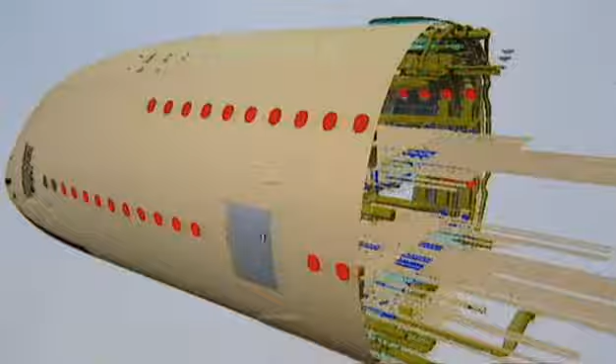European plane maker Airbus is staking everything on a machine that they hope will replace the big Boeing and dominate the market for years to come. By any standards, taking on the 747 is a massive gamble. If they succeed, they'll make a fortune. If they fail, billions will have been thrown away.

This aircraft cannot be a failure. When you invest $10.7 billion on building what we're pronouncing to be the flagship of the 21st century, you can't fail. There isn't a 'well, we almost got there' or 'it's so-so, not too shabby.' No, either it's going to be that flagship of the 21st century, or it's going to be a disaster.

Since 2003, Channel 4 have had exclusive inside access to this huge project, from the senior management fighting deadlines and budgets. The people are exhausted already. They are under the highest pressure you can imagine.

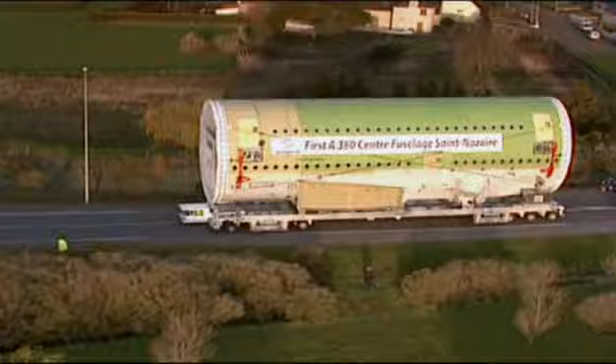To the men and women actually building the plane. These moments really piss me off. It's a tale of the struggle to manufacture giant components all over Europe, and then to ship them to France for final assembly. We are crazy. It's a mammoth high-technology engineering challenge: the race to build, test, and fly the brand new machine.

In charge of it all is 48-year-old Charles Champion, head of the entire project. He understands only too well the risks involved. What is at stake, I would say, with such a program is basically the future of the company, as such. Really? Really.

Airbus was created in the 1960s, when Spain, Britain, France and Germany decided to take on the might of the American aviation industry. Their first aircraft took off in 1972, and nowadays they make over 300 planes a year. But the A380 is on a different scale altogether.

Building such an aircraft, it's a bit like climbing a mountain. You see the mountain in the distance, it looks high, but not too high. And you start walking, and you get to the first level, and then you say, 'Whew, this one was hard.' And you get to the next one, it's even harder, and so you see the summit. It's getting closer, but at the end of the day, there's still a lot to walk and a lot to climb.

The project began 17 years ago. Philippe Jarry was involved from the start. I think it was in '88 where there were the first meetings, very secret meetings, between very few people in Airbus who said, well, if we had to imagine a very big airplane, let's say 500 or 600 seats, how would it look?

Starting from scratch is the most expensive option, but it's what Airbus decided to do. The plane went through dozens of iterations as designers and engineers worked for over 10 years.

The size was driven by the airlines, struggling to increase passenger numbers in the face of increasing air traffic congestion. The airlines told us, don't be shy, don't hesitate. Of course it has to be big, bigger than anything that is flying. So don't be shy, don't hesitate. Make it really big.

The resulting design was a plane with 49% more space than a 747, capable of carrying over 850 passengers. Using advanced technology, it would be highly efficient and, crucially like the Jumbo, have no competitors.

If they could get it right, the A380 could fulfill its ultimate goal: to make huge amounts of money. Is this about money? Of course it is. Think about the revenue potential. Each airplane sells in today's dollars at a catalog price of about $300 million.

Now, over 20 years, our global market forecast is about 1,600 aircraft. Assuming we got that entire market - we won't, but assuming we did, with a monopoly position you'll get pretty close to it - that would be, over the next 20 years, $480 billion US dollars. Suppose you only get half of it: $240 billion US dollars at catalog price. Now that is an awful lot of money.

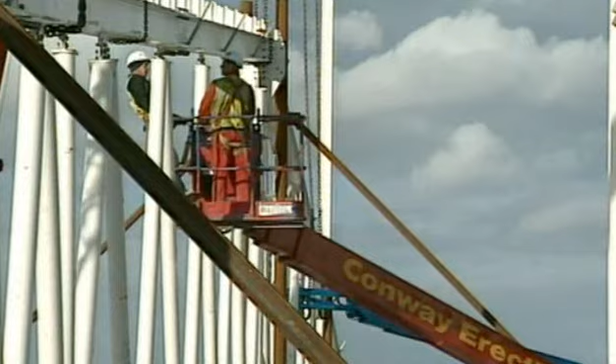December of the year 2000. Now that Airbus have a basic design for their huge new plane, they can start building it, or rather the buildings that will build it. The aircraft is so big that new factories are needed for almost every major component. On top of that, Airbus always share the work between its 4 founding countries, so a major international construction project is required.

The A380 will be built from a giant kit of parts made mainly in Spain, France, the UK and Germany. Each country has had to invest heavily in new facilities. Other parts will come from more than a dozen other countries, so the plane is truly a global effort.

It's big, it's really big. You name it and the people are working on it, so at the end of the day it's almost impossible to count the number of people working on this project.

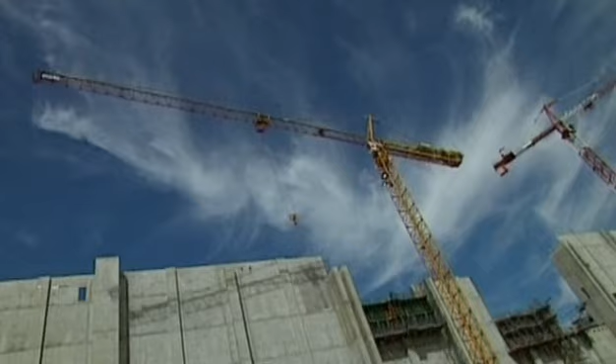The biggest single development is near Airbus headquarters in Toulouse. The final assembly line is where the various components of the plane will be joined together. Work began in 2001 on a complex that would cost £240 million on its own. A third of a mile long, it covers 24 acres, big enough to hold 8 planes at once.

The huge cost of this programme means Airbus have to sell 250 planes just to break even. And to help the drive for early sales is a nearby showroom. Inside is a full-size demonstrator of the new machine.

Getting customers to spend a lot of money on a plane that has yet to fly is quite a challenge. But Chief Commercial Officer John Leahy is full of confidence. Why would you want to spend $265 million for something like this? Because it'll do something no other airplane in the world can do - bring people 8,000 nautical miles in a level of comfort that's never been provided before.

Although this interior is just a fantasy, an exercise in design possibilities, it is still a salesman's dream. How often do you see this? Well, yes, it's an extra large loo, but it's also a shower. And this is something that you don't see in an airplane, and maybe you should.

The mock-up is designed to whet the appetite of customers such as Sir Richard Branson, head of Virgin Atlantic. He's agreed to buy 6 planes, based on the promise that the A380 will set new standards for performance and efficiency.

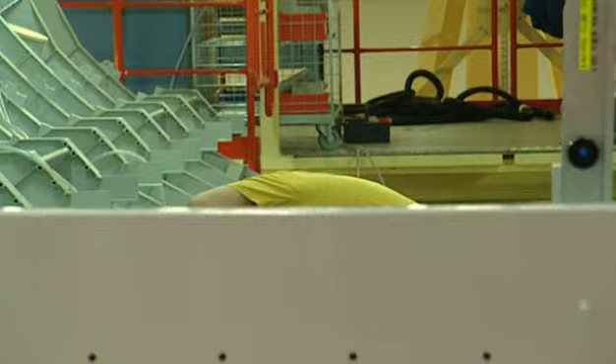The first piece of metal is cut in January 2002, and shortly afterwards, huge components are being produced in brand new factories all over Europe. In Germany, large sections of the fuselage rapidly take shape, put together using high-tech materials and thousands of rivets. In France, the carbon fibre centre wing box, the structural heart of the aircraft, comes together.

In the UK, in Broughton, North Wales, the wings themselves are assembled. Built up from hundreds of components, each one is constructed standing on its rear edge. It looks more like the hull of a ship than part of a plane.

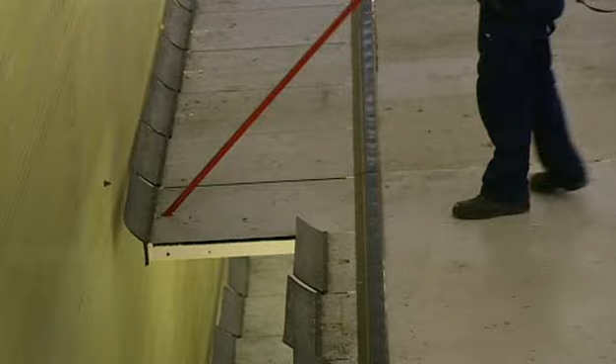By November 2003, the first wing is ready to be hoisted out of its supporting jig, and engineer Simon Shingler and his team will get their first sight of the giant part.

The whole idea of having you all here is to make sure that you're all concentrating on your one specific station, right? And that's how we're going to ensure that we're going to take this wing out without anyone hurting themselves or without the components getting damaged. When we're lifting this wing out, make sure all the mobile phones are turned off.

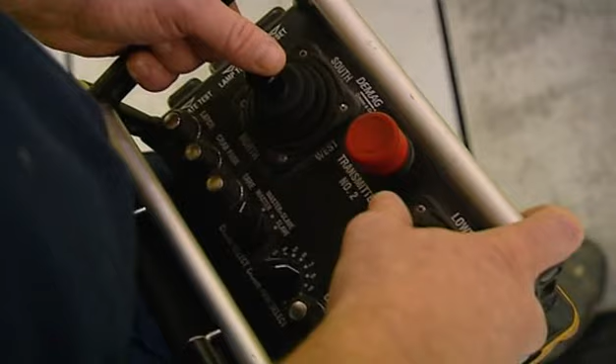Alan Ferguson is in charge of the first stage, attaching the hoist to the solid titanium lifting points. What we're doing is we're making sure we get the crane correctly aligned with the lifting attachment, so when we make the initial lift, we don't get any sway on the wing. So it's critical, yeah.

That's got to be twisted back on it like that.

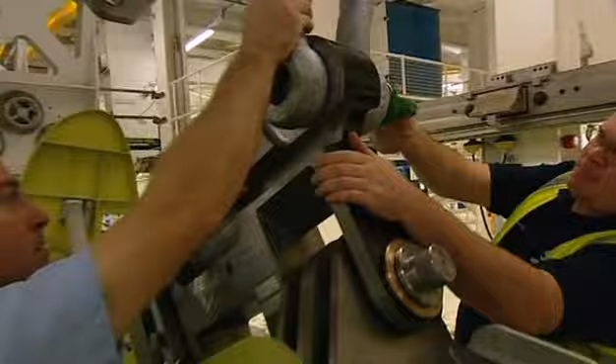Right, we're ready to go. We want everyone in place now, and then it's like we're going for it now completely. Right, gather round please, gents. The operations team and the crane driver is going to take some weight, we're going to release the front spar, and then we're going to remove the wing.

Try to stay calm, don't panic. We'll do everything nice and slowly, there's no rush now, but once we start, we're not stopping. Thanks very much. Okay. Right. Steady now. Okay. All right, you're clear, take it off. Right. Get that spar support out, please. Is it down? Right. Yeah.

With one small movement, the wing is free. Clear. I think the wingtip's clear. Yeah. Now it can be lifted out and into the next hall. Don't forget the outboard end.

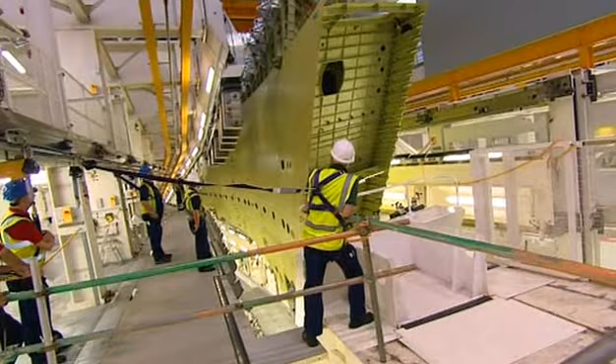The wing may look big now, but once the rest of the parts are fitted, it will grow by half as much again. The true size of the A380 is starting to show. I think the whole world's going to look on in awe the day it flies. I think the Boeing Aircraft Company have got something to be very wary of.

But even while the major components are being built, detailed design of the interior and many other parts is far from finished. Charles Champion and his team of senior executives meet once a fortnight in Toulouse to try and keep the project on course.

With so much happening at once, there is a real danger of becoming overloaded. Can we start? It's a question of time management, because not only time management at work, but also time management with your personal life. And you can burn out. Basically, if you're not careful, you just can burn out, and at the end of the day, you're out.

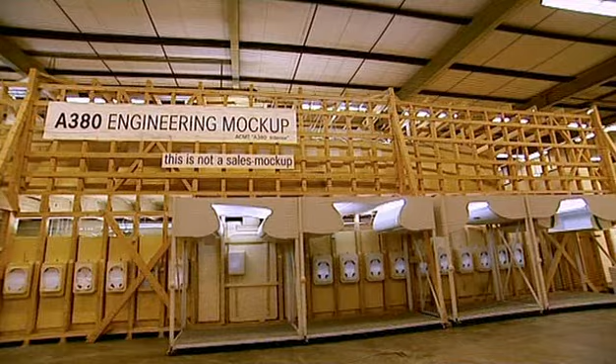Andreas and his team work from this unmarked warehouse near Hamburg in Germany. In private, this is where Airbus and the airlines can agree exactly on the interior design of the plane.

Each airline wants a customised interior, so Andreas has to engineer dozens of unique features to keep them all happy. You can change the lighting over here - you can have green light, you can have blue light.

Then there's the task of turning the sales department's dreams in the mock-up in Toulouse, of showers and the like, into reality. We will have showers on our aircraft, but not in the way they are displayed at the moment in Toulouse, because those are designs by designers, not by engineers building the stuff.

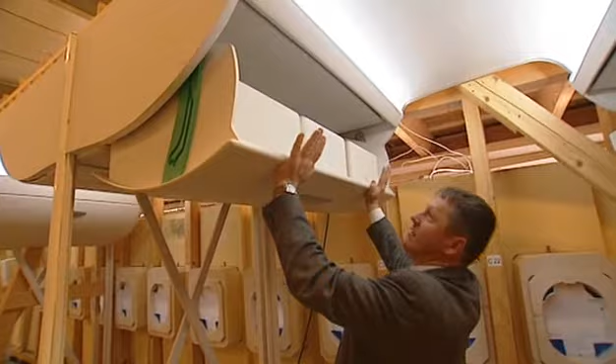Even engineering something as simple as the overhead lockers is a challenge. Which is manually operated - the loading limitation of these bins is 50 kilos or 60 kilos. So you can imagine if you have a stewardess or a passenger trying to move 50 kilos like this, they are not that strong, and it is a difficulty.

Although the cabin doesn't need to be finished for the first flight, building and testing it is a process that will take several years. Even now, if the early customers are to get their planes on time, the team have their work cut out. What is really needed is time. Time.

By March 2004, the first set of wings are nearing completion in Broughton. The fuselage parts are almost ready to leave northern France and Germany for the final assembly line in Toulouse, where everything will be joined together.

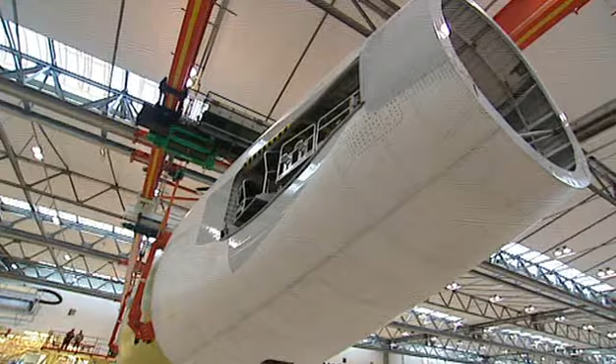Carrying such large objects thousands of miles is a major task in itself and requires one of the most complicated and expensive transportation systems ever devised. The parts will travel by road, river and sea in a logistical dance that has to fit together perfectly and work first time.

The fuselage, wings and tailplanes will be carried by ship from factories in Germany, Britain, France and Spain, converging on the port of Pauillac near Bordeaux on the west coast of France. From there they'll be loaded onto barges that will carry them 59 miles up the River Garonne.

But still the journey isn't over. A fleet of lorries will haul the parts by road the last 152 miles to the brand new factory in Toulouse.

It's a highly complex scheme that's never been attempted before, and it starts in Hamburg on the 24th of March 2004, as the first finished fuselage sections of the giant airliner emerge into the light of day.

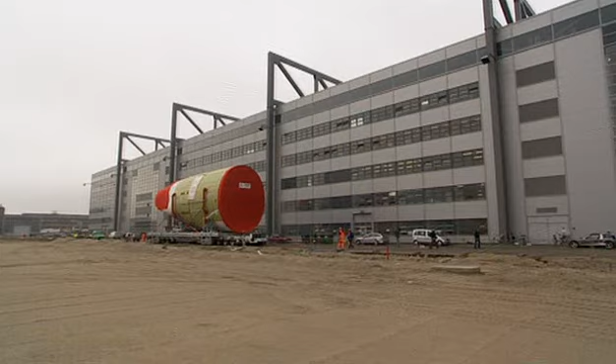The parts are carried on purpose-built, radio-controlled, self-powered low loaders. Each one has 96 wheels and can travel at a maximum speed of 6 miles per hour. The factory is just a few hundred yards from the purpose-built dock where the cargo ship waits.

Now begins a 970-mile voyage through some of the busiest shipping lanes in the world to the west coast of France. Thankfully, the weather is perfect.

In Britain, a few days later, the wings begin their journey. For the UK team, it's a significant day. After the last 2 months of preparation, and the previous 2 years of planning, we've actually got the moment now when the wing's going. So it's an exciting time, and it's what people here have looked for many, many months.

Stage 1 of this 1,000-mile trip is to use another low loader to carry the wing a mile from the factory to the nearby River Dee, where a barge is waiting. On the way is a narrow bridge, and there'll be just inches to spare.

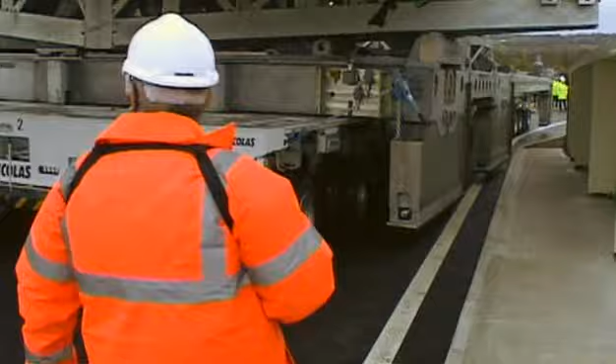With the first obstacle behind them, the wing is ready to be loaded onto the barge. Now the dangerous tides on this treacherous stretch of river are the next hurdle to overcome.

It's not to be messed with, this river. The tide's important because downstream there are 3 low bridges, and beyond them lie constantly shifting sandbanks. Sail when the tide is too high and the barge will hit the bridge. Wait for it to fall and they could easily run aground. It's a real balancing act as to where you get off the blocks and get under the bridge.

Graham Harwood, the barge captain, has been studying the river for the last 4 months. He's hoping to clear the first and lowest bridge by just 50 centimetres. The first bit is the bridges, having a clearance of probably around half a metre. That's what we've set in - we've got to have half a metre clearance under the bridges, so the timing is of the essence.

At this time of the month, the current is running dangerously fast. They haven't picked the right time for us because the tide is making probably about 5 knots, and we've got to compete with that later on. So not the best time of year, not the best tide for the first time it's been done, but I'm sure we'll manage it. We'll have to.

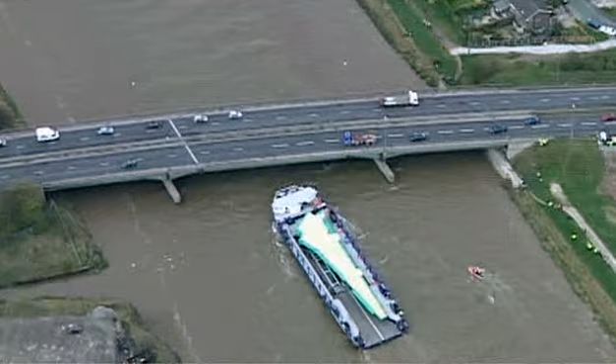Yeah, there it is, look. Just hope this bridge is any taller than they say it is. Look now, hey, I tell you what, that is nice, that is beautiful. Isn't that beautiful? Exactly 50 centimetres. Exactly.

Graham has judged it perfectly. Cutting it fine under the bridges has given him plenty of water under his keel for the remaining 13 miles of river. Soon he'll rendezvous with the ship that will take the wings to France.

As the race to build the Airbus A380 gets underway, development continues all over the world. In Phoenix, Arizona, the aircraft's 16 escape slides are being made. Each one is custom built to meet stringent regulations, and that means a lot of testing. Each slide is designed on computer, and this is one of the most complex on the whole plane, the over-wing slide. Today it will be tested for real, a critical time for the engineers.

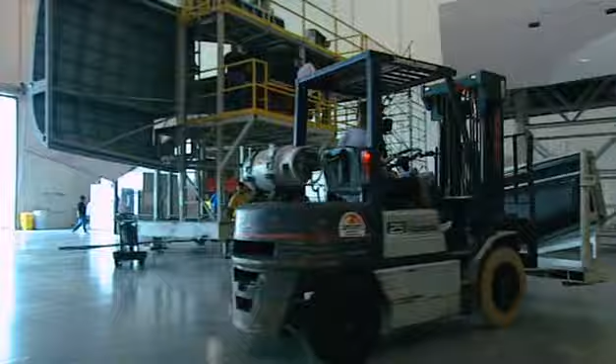This is a brand new slide, fresh out of our prototype department. It's never been deployed, it's never been slid on, and the pressure is on. The slide fits in a small pack, which is mounted to a full-size mock-up of the plane. It allows passengers to get from a door here, across the wing to the ground, deploying almost as if by magic from here. 3, 2, 1.

The regulations say that 850 passengers must be able to get out of the A380 in just 90 seconds. And the only way to prove the slide is up to the job is to use real human beings. 40 people will take part in the test, and the first step is to get everybody warmed up.

Everybody does it, let's go. Let's do it, come on.

Ted Oney, who'll be running the test, is wearing a rather special shirt. This is my lucky Hawaiian shirt, of course. Every time I want to run an evac, I wear this shirt. So when people in the plant see me in this shirt, they know we're running an evacuation test.

The aim of the test is to show the slide can hold up to the weight of the evacuees and allow a safe but speedy exit in an emergency. Our slide will have to have 40 people traverse down the slide in less than 17 seconds. That meets our specified rate. So in the grand scheme of things, we'll be able to say that we could evacuate the entire airplane within 90 seconds.

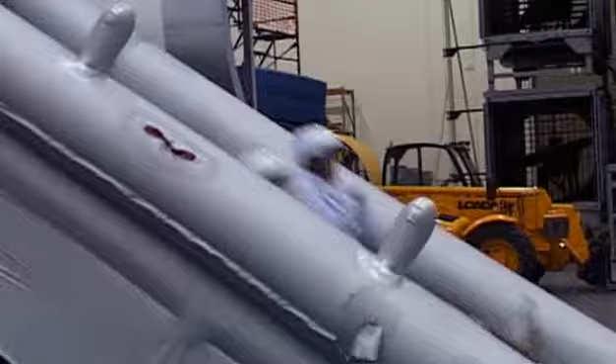In these tests, the passenger's weight is the main consideration, so the engineers are allowed to use able-bodied volunteers. It's a good thing, because 2 hours of solid sliding are needed to prove the design.

You got some bounce on that one, you okay? At the very end comes the most dangerous test of all. To simulate an evacuation in a rainstorm, the slide is sprayed with water. It's risky because now everything is much more slippery.

As the water puddles on the floor at the toe end of the slide, it means the landing surface is slick. People are used to landing normally, and suddenly it's much more slippery, and if we don't do our job right, we get a pile of bodies at the bottom.

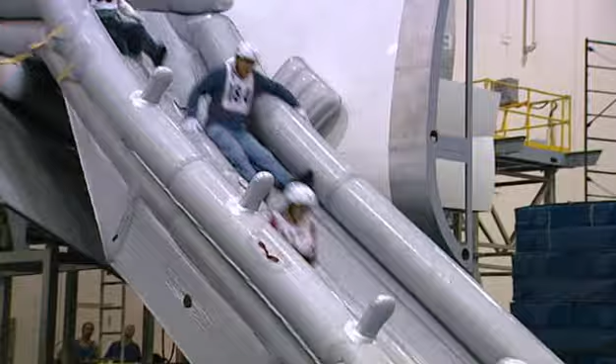Go, go, go, go, go, go, go, go, go! Get out, get out, get out, get out, get out, get out, go, go, go, go, go, go, go, go, go, go, go, go! Come on, come on, come on, come on!

Yeah! All right, all right, yeah! All right, have a seat, have a seat. Great job, everybody, great job! I'm not doing that no more, no way, I quit. Excellent, excellent evacuation.

I'm very pleased, yes, I'm happy with that. There wasn't a lot of bumping, the slide did well. One slide tested, just 15 more to go.

By the 7th of April 2004, thanks to careful planning and good weather, 3 huge pieces of fuselage are nearly at the factory where they'll be joined together. All the components made it safely to Pauillac, up the River Garonne and past the city of Bordeaux.

Now comes the last leg, 152 miles by road to Toulouse. Loaded onto specially built trailers, the parts have spent the last 2 nights crawling through the French countryside, on roads closed off by the police. Although the end seems in sight, the biggest challenge lies ahead.

2 miles away lies the small village of Levignac. This is the narrowest point on the entire journey. According to calculations, the fuselage will only just squeeze past the houses with centimetres to spare. The event has attracted massive public interest, and the police are taking crowd control very seriously.

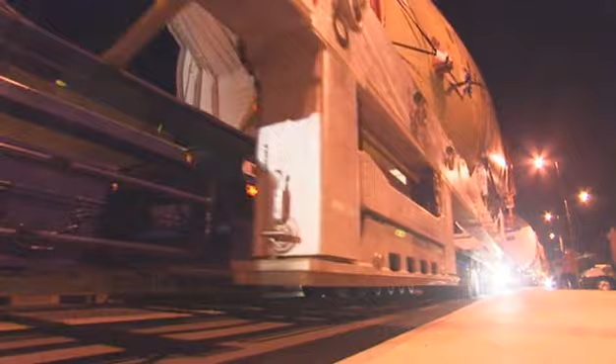This is no one-off event. When the plane hits full production, these convoys will be passing through once a week.

With Levignac successfully navigated, the last 11 miles are relatively easy. At last, after travelling by ship, barge and lorry, the lights of the final assembly line are in sight.

Although it's nearly 3 o'clock in the morning, there are several hundred people waiting outside the massive new factory. Among them is Charles Champion, here to witness a significant step forward.

The delivery papers are signed, and now Charles and his team are ready to tackle the next phase of this enormous project.

For some people it's like a relief because they've delivered the final assembly line, they've done the factory, they've demonstrated the transport system. But for us guys, we are looking at the next steps: integration, first flight, then flight test phase, and then deliveries to the customers.

The work has only just begun.

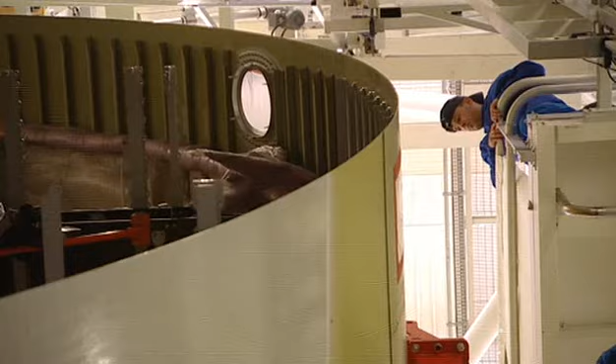Supervising this difficult phase is Gilles Cormier. We need to be very, very accurate. We have to be sure that the general shape of the aircraft is in line with the specification, that the geometry of the aircraft is good, and to avoid twist fuselage or twist wings. And the performance of the aircraft depends on this shape.

Ensuring that the 3 body sections of this 73-metre giant are brought together in a perfectly straight line requires massive tools, the latest technology, and lots of patience. I feel very confident now, even if it's difficult, because we have put in place very accurate systems.

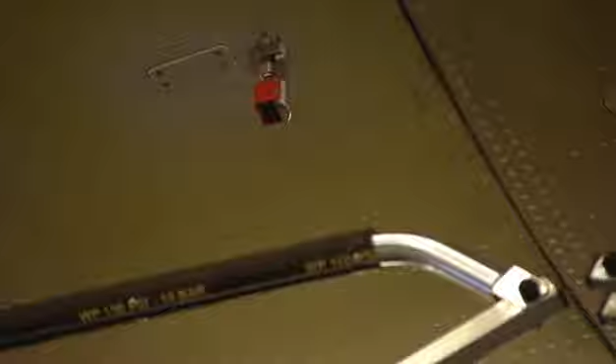The key to success lies in the use of lasers. Invisible beams scan the sections of the fuselage, and the light is reflected by mirrors mounted on the approaching components. From these reflections, a computer can work out the exact relative positions of the parts, ensuring perfect alignment.

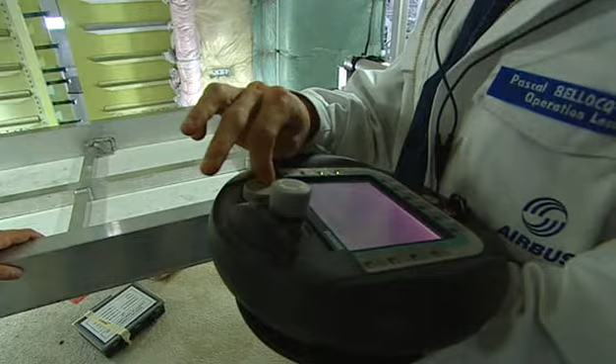Once positioned, the fuselage shells are brought together very, very slowly. Each turn on the dial brings the massive parts a millimetre closer together.

On the left, a part made in Germany. On the right, one made in France. The last stage of their 1,200-mile journey.

The clearance is so tight, metal shoehorns are needed to ease one shell over the other. But it's a perfect fit. The final joining together of an elaborate European jigsaw puzzle.

Soon the sales team will have a real plane to show to their customers. But the question is, will the airlines like it?

It's now the 23rd of July 2004, and for Chief Commercial Officer John Leahy, the pressure is mounting. Leahy needs 250 firm orders for the project to break even. So far, he has 139.

Today, Qantas Airways, who have ordered no less than 12 aircraft purely on the strength of Airbus's promises, are coming for a tour to see if they've spent their £1.8 billion wisely.

We're going to go out and greet them? Yeah. Okay, well, where's Chris? Is that time? Are they going to get about a 10-minute warning or something on the bus?

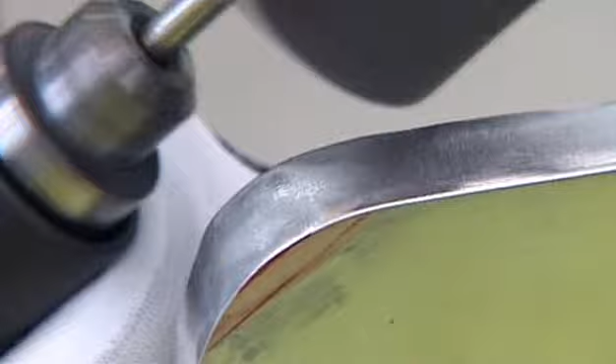It's also an important day at the factory, as the first wing is about to be mounted. Despite the use of computer-aided design, teething troubles are inevitable with the prototype, and some minor work is needed on the fittings for the joint. Project leader Eddie Davis has to respond quickly to this kind of challenge.

It can happen with new aircraft. This is a last-minute job that we've had to come up today. We didn't know that the fittings weren't to the right standard, so now the guys are reworking them.

Once again, accuracy is vital. The slightest error in the angle at which the wing meets the fuselage could have a drastic effect on the handling of the plane, and critically, its fuel economy. With so many sales resting on the performance of this machine, it's a job that cannot be rushed.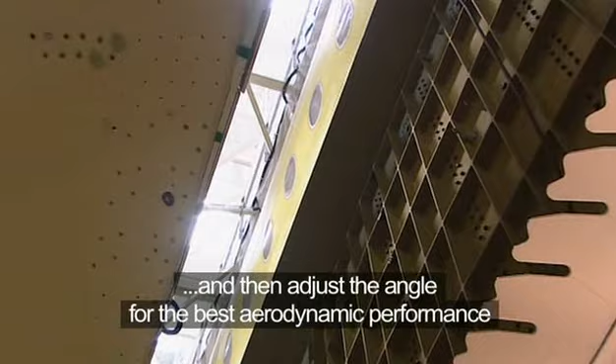Again, the laser positioning system ensures the wing is in the right place and at the right angle. But after a whole day of careful work, another small problem appears.

Some large bolts have been left attached to the wing. We must remove this one to finish the junction of the wing.

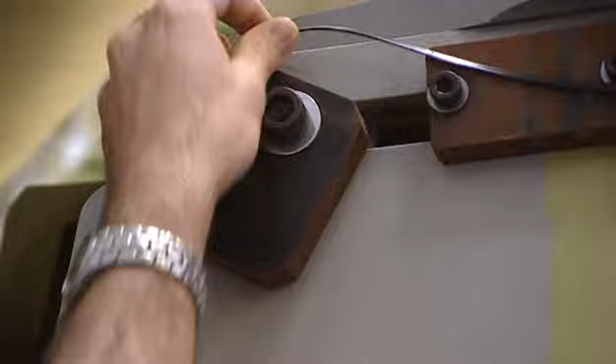A quick phone call to check that it's okay to remove them, and now the wing can be safely joined to the fuselage.

A couple of miles away, at the perfectly manicured Airbus headquarters, John Leahy is conducting his guided tour for Qantas. They have arrived at the Airbus showroom, where they'll see a new, far more realistic interior.

Okay, now I think we've got just about everybody. Okay, now Rod. Though it's all smiles, this is deadly serious. If they don't like it, there'll be trouble ahead.

It's almost like a young family introducing their new baby to the relatives. You want everybody to be impressed. You want everybody to say it's beautiful. And deep down inside, you're really waiting to see what they truly do say.

The head of the airline is Geoff Dixon, a tough-talking, no-nonsense businessman. To begin with, he doesn't seem too impressed. Notice the headroom. This is coming out about standard size.

John presses on with the walkabout, and then, almost in a whisper, Jeff reveals his true feelings. But just to give an idea of the space that you've got. Let's do it.

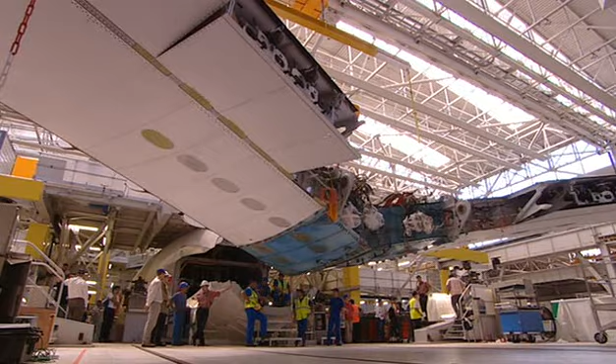This is the horizontal tailplane. With a span of 32 metres, it's as big as the wings of a small airliner. Made of carbon fibre in south and central Spain, it's easily the biggest tailplane ever made.

The tail fin is another carbon fibre monster. 14 metres high, this component is made near Hamburg in Germany. When installed, it will stand as high as an 8-storey building. Some airports will have to buy new cranes to service it. Carefully, it's craned into place and attached with 24 titanium bolts.

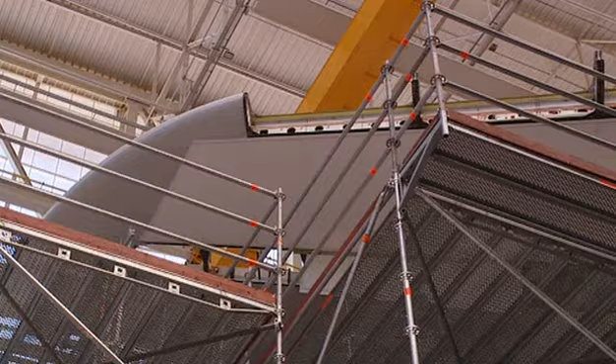As the last piece is attached, Charles Champion comes to check on the plane, and Gilles Cormier has bad news for the boss.

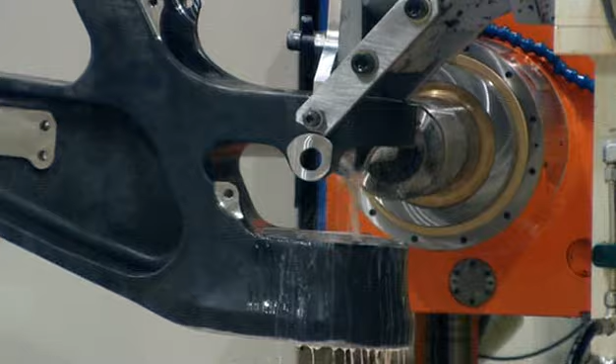The 747's gear is made by Goodrich, who are also supplying the main gear for the A380. Here, near Toronto in Canada, production is well underway, and testing is just about to begin.

When we have a new landing gear program, we have a lot of tests that we need to do: strength, performance, dynamics, durability. This one is a performance test. This is one of the first tests we do, and it's one of the more important tests. It's called a drop test.

What it is, is a simulation of landing. So when an A380 lands, you've got 560 tons of aircraft moving slowly towards the ground, as well as 200 miles an hour down the runway. When the aircraft hits the ground, something has got to absorb that energy. If you jump off a chair and land, your knees have to bend and give a little bit - even just with the weight of a person, you're going to damage yourself if nothing gives. That giving of your knees, your legs are absorbing energy. That's what the landing gear has to do, but instead of 180 pounds, it's got to do it for 560 tons.

Suspended inside this huge tower, the landing gear is raised in preparation for the drop. The rig is static, so to simulate the approaching ground speed, smaller wheels driven by powerful electric motors spin the big 55-inch tyres in the reverse direction.

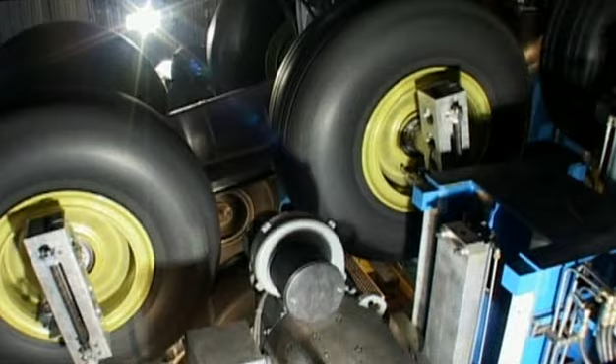When a switch is flicked in the control room, a hook at the top of the tower will release, allowing the gear to fall. It must absorb the same energy as a 100-mile-an-hour car crash without being damaged.

This could be a make or break test. If the performance of the landing gear isn't what we predicted it to be, it could impact the schedule for the first flight. So it's essential that the gear performs to how we predicted it, and from these tests, we'll be able to tell whether it does.

Although it's huge, the size of the A380 means that this 6.5-ton component is just one part of the plane's undercarriage. In total, there will be 2 6-wheel units under the body, plus 2 4-wheel units under the wings, and a 2-wheeled set in the nose. So what you're about to see is only a fraction of the energy involved when the vast airliner touches down.

Okay, I'm going to drop now.

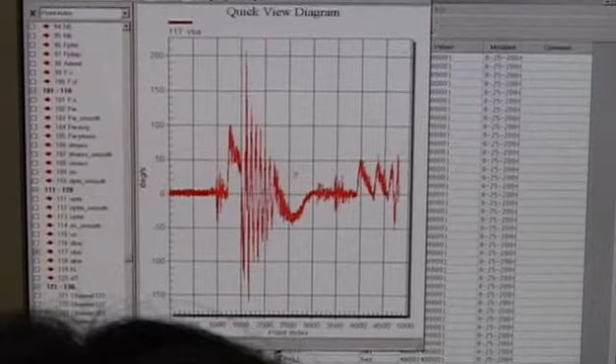It's now only 9 months to the first test flight. In Toulouse, the tail cone has finally been fixed, and the A380 is at last ready to move to the next stage of assembly. For Gilles Cormier, it's a relief. Maybe we forget a little the trouble we encountered during the past weeks, and now we are looking at the aircraft itself, the achievement, more than the difficulties we had. Now's the chance to see at last the biggest airliner ever built.

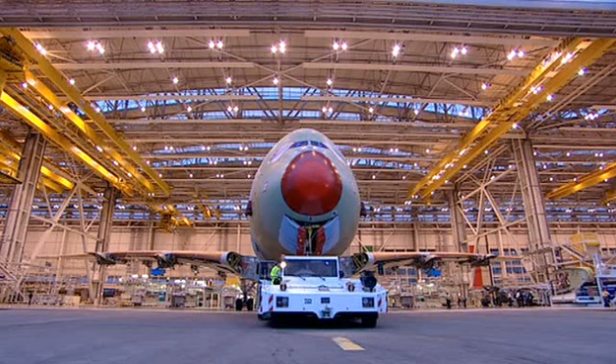With the shell of this aircraft complete, things are about to get really complicated. The plane is scheduled to spend the next few months in this vast hall, where thousands of parts will be fitted, including over 500 miles of wiring. The man in charge of this tricky phase is fully aware there's an awful lot of work to be done by the end of October. It's a very difficult challenge, because it's a prototype. So it's very difficult to meet our deadline.

August is fast approaching, the traditional holiday month in France when most of the country shuts down. For Airbus engineers, this year there will be no holiday. My family are very aware of this personal challenge, so everybody in the family is okay to say, okay, this year it's the aircraft year.

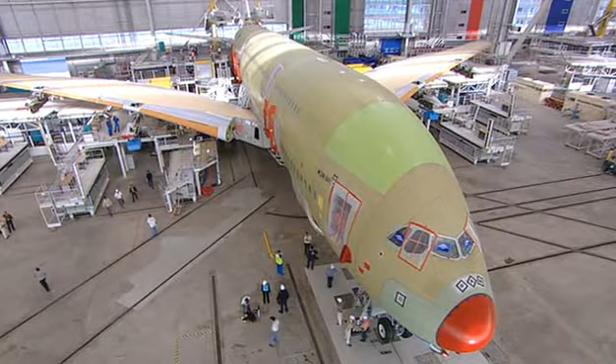The plane is lifted on huge jacks, and teams of technicians begin work. The next milestone is when the aircraft will be revealed to the world, just 196 days from now. Attending will be VIPs, 5,000 guests and the world's media, with the pictures beamed by satellite all over the world.

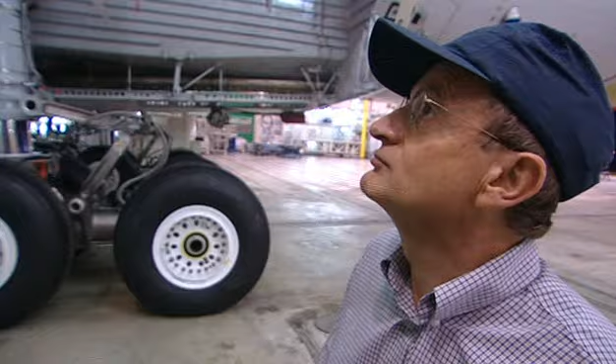But for now, one 55-year-old man has a rather special interest in the new machine. Jacques Rosay will be the first person in the world to fly the plane. Seeing it for the first time, his reaction is not exactly what you'd expect. Generally speaking, no, it's an aircraft. Larger than the one we have already, but I think I feel very, very confident.

He's confident because although the plane is still far from finished, he and his team have already spent thousands of hours flying it. These flight simulators hold the heart and soul of the new plane, already living and already being tested. The state-of-the-art computerized flight control system means that the plane can be made to handle almost any way the development team chooses.

You don't realize that you fly such a big aircraft. You fly it like you fly a little aircraft. It's incredible. It's very, very easy to fly, like a bicycle. It's a kind of large bicycle, if you like.

The simulator is so advanced that today they are testing a scenario that is only likely to occur once in over 1,000 years of flying. 3, 2, 1, now. The wings are covered in ice, 2 of the engines have failed, and half of the flight computers have gone offline. Can the plane still be controlled? Piece of cake. The technology that makes the plane so safe is also extremely complex.

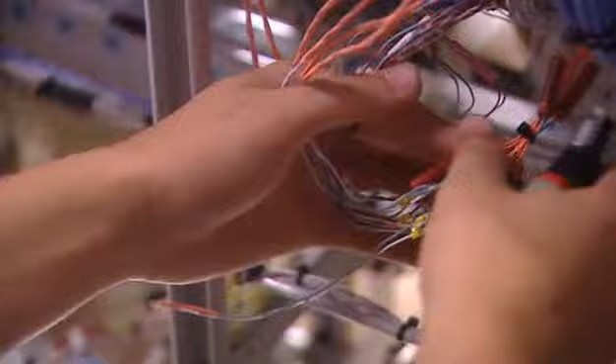And when battling against a deadline, complexity eats valuable time. The schedule is slipping. Getting the airplane out on time is critically important. There are significant penalties that we would have to pay to each customer if we delay his aircraft after a certain grace period of, I don't want to say how long, but a certain grace period involved in every contract.

We can't relax. We have no right, we have no time to relax. So every hour, every minute we are there on the workshop, our main job is to receive pressure and to transmit pressure. And it's a nightmare.

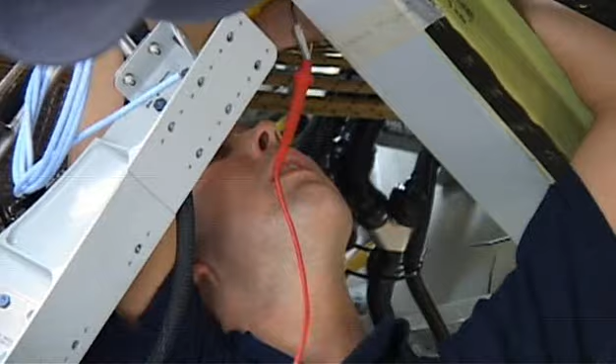The penalties for late delivery run to hundreds of thousands of pounds a week. And that pressure runs down the chain of command, all the way to the men and women building the machine. Some people could, how do you say, break down.

Christian Polite is the engineer in charge of the tail fin, known as the vertical tailplane or the VTP. Building this huge part has not gone smoothly, but finally it's time to install the last piece, a camera that gives the pilot a bird's eye view from the very top of the fin, some 23 metres up. Right now we're going up to almost the very top of the vertical tailplane in order to install the last component which remains on the VTP.

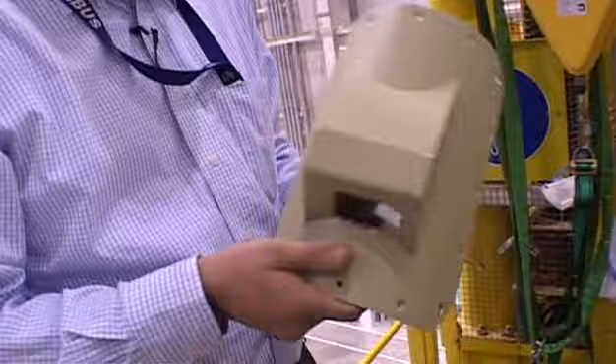You can easily see that this part is only screwed to the structure by, I guess, 20 screws around, and it has to be connected to the electric system via these 2 little connectors. The signals are transferred via a fiber optical cable down to a monitor in the cockpit.

Here at the Airbus factory in Stade, Germany, back in February 2004, Christian oversaw the final construction of the largest carbon fibre fin ever conceived. The ambitious scale of the production process meant there were always going to be problems.

We started with a schedule which allowed us to assemble the first fin within a reasonable time. But in fact, we encountered problems which delayed the assembly. And to worsen the situation, the lead time was shortened.

So we ended up with a lead time that was nearly half of the original lead time we planned. The fin was delivered on time, but it wasn't completely finished. Christian has had to move to France to continue the work. We came here and thought we have a good planning, we have a good time schedule, we have everything on hand, but it wasn't like that. The moment we started working, we had to change each and every point. The planning was upside down, and so we had to start to work.

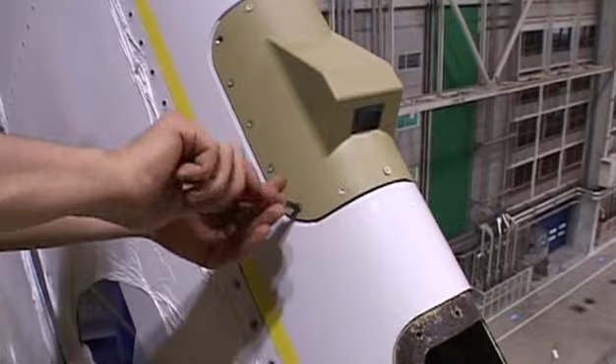Now though, as the screws go in on the camera, the end is in sight. It's a good sound. That means the screw is in. With every screw, we're a little step towards the end, yeah?

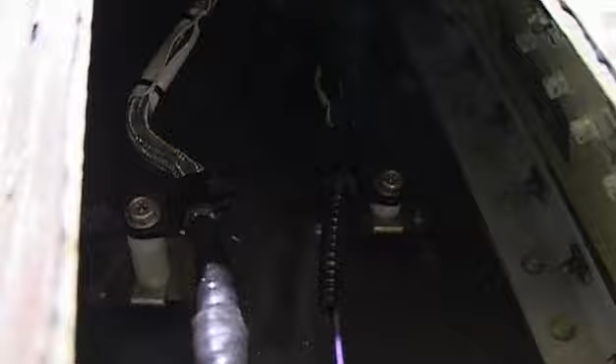The connector is here, and the cable ends here, and we have to have another 1 centimeter, about half an inch, which is how much too short the cable is.

I mean, but these are, yeah, these moments really piss me off. I mean, when you're almost done, so close, you can see the end. You almost stepped over the line, and then someone blocks you, hits you in the face, saying, "Hey, you're not yet done." How could you imagine?

Despite the setbacks, the build must continue as fast as possible. Now they can begin mounting the engines, some of the most expensive parts of the whole aircraft. Together, 4 of these giant Rolls-Royce Trent 900s cost nearly £36 million, a quarter of the cost of the plane.

Back in May 2004, the engine flew for the first time. It was bolted onto a much smaller airliner, dwarfing its other engines. Weighing over 6 tons, the Trent 900 can produce up to 35 tons of thrust at full power, burning a gallon of fuel every 4 seconds.

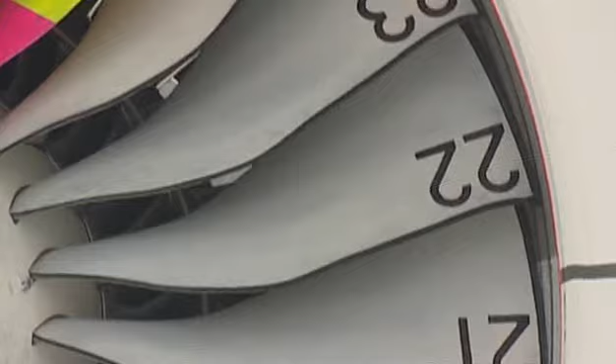Every few years, a fan blade will break in a jet engine somewhere in the world, a rare but violent event that must not put lives in danger. At the root of the coloured blade is an explosive charge. With the engine at full power, it will be detonated, releasing the blade with tremendous force. Whatever happens, no large debris can be allowed to burst out of the engine casing. If it did, it could do serious damage to the rest of the aircraft.

From the safety of a room 200 metres away, watching on video, 25 key personnel are waiting. In the split second the blade is released, the casing must successfully contain an enormous impact.

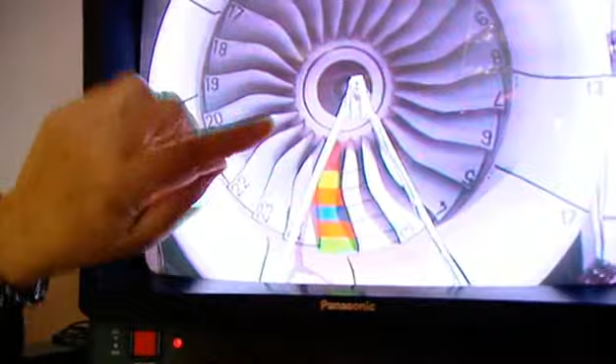It is a very violent test. This thing is spinning around, it's at full power, so the forces on the blade are quite significant. It's like having a locomotive hanging on that blade. So you're actually having to contain the energy of that system. There's a lot of energy involved in the design and containment of the blade.

The engine is run for 5 minutes, so final checks can be made. With such an expensive test, nothing can be allowed to go wrong. High-speed film cameras are used to analyse the action, and at last the throttles are opened and the engine brought to its full, awesome power.

This is what it feels like to be inside a building 200 metres away from a £9 million blade-off event.

Blade-off testing is normally top secret, but for the first time, Rolls-Royce have released this footage. Although the engine was totally destroyed, the fan case did its job, and no large lumps of metal were ejected.

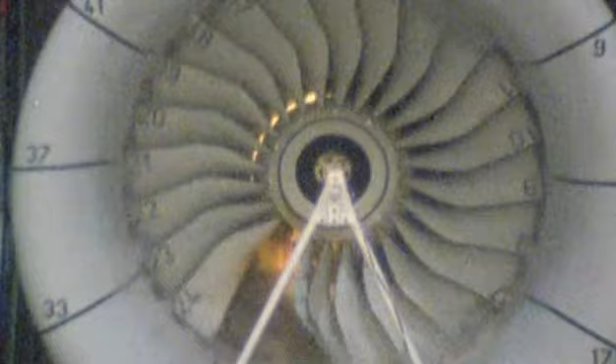Well, that was an expensive 5 minutes. It was, wasn't it? I feel very relieved.

Obviously, it's gone well. We've had a good test, and it's all credit to the guys. Yes, we've got a successful test under our belt. So I feel relieved and really pleased.

By December, the plane is finally about to leave the equipping hall in France. Airbus are trying everything to make back time, even if it means working over Christmas.

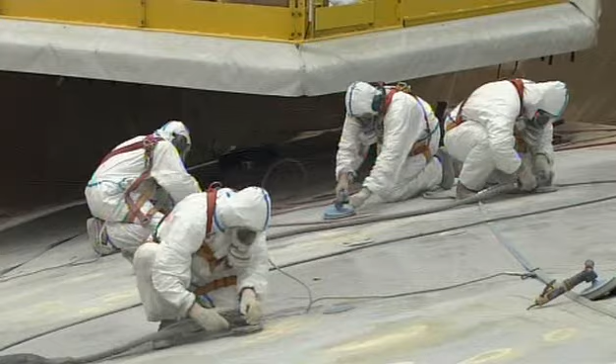With the grand unveiling just 5 weeks away, the next giant task is to paint the massive machine. In yet another vast hangar, working over the holidays, 90 painters descend on the plane. First, they rub down over 10,000 square metres of bodywork. Then, after applying a very large amount of brown paper, the A380 is ready for a brand new paint job.

All in all, more than half a tonne of paint and primer are needed to protect the aluminium skin from the elements.

The final livery has been a closely guarded secret, until January the 18th, when the A380 goes public for the first time. The world's press are here, and as ever with this plane, it's a big deal. Inside part of the final assembly line, seating for 5,000 guests has been installed.

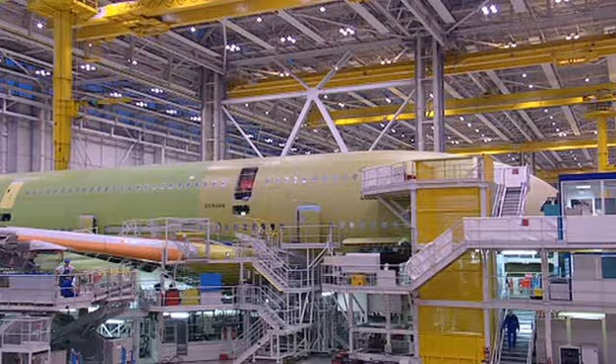In the equipping hall, now full of part-built planes, TV reporters are hard at work, feeding the story to the networks. Richard Branson has grabbed the headlines with news of double beds and casinos in his planes.

For John Leahy and many others, it's a welcome moment of satisfaction. It took an awful long time to get here, didn't it? But now we're here. It's pretty exciting.

The heads of state and governments arrive and take their places for a spectacle featuring dry ice, flying machines and computer graphics.

Despite several high-profile speakers, there's only one star of this show. Finally, the biggest airliner of all time is there for all to see.

For Charles Champion and everyone else who built the plane, it's a moment to savour. Well, it's a good achievement, huh? I mean, a good show and good speeches and a nice aircraft.

And tomorrow back to work to make it fly. No, it's good. It's good.

With the plane unfinished and with billions of pounds riding on its performance, the programme is about to enter the most critical phase yet.

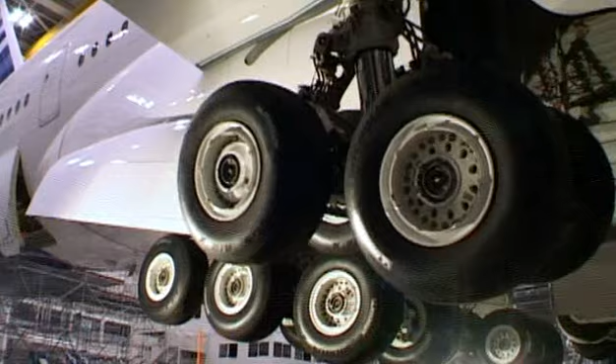Altogether, the gear weighs the same as 20 family cars and must be lifted into the belly of the plane in just 13 seconds.

Getting the system operational has taken months of hard work, but now it looks as if they're finally making progress. The last few months have been very frustrating because we've had a lot of technical difficulties with systems on the aircraft. We've had a lot of problems during testing, so we've all been working very, very hard in order to have all of our systems working for first flight.

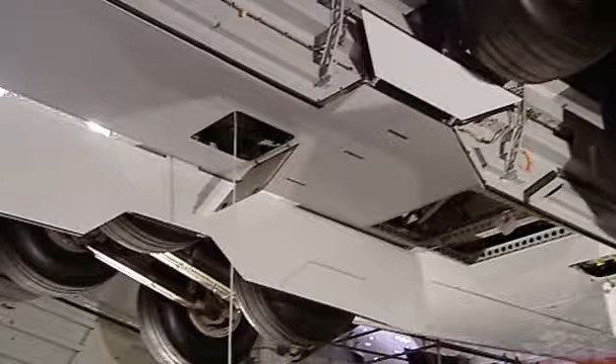So that's system one, looking good. This is why we're here. Days like today is why you do this job, because it's very exciting to see the gears moving, and you spend an awful lot of time making sure that the right parts are where they should be, and so I've been waiting for this for months.

Their last hurdle is to simulate a worst-case scenario. Even if all power was lost during flight, the pilots must still be able to lower the wheels to land. In such an emergency, the gear should fall down under its own weight. But testing it is risky because the wheels will hit the doors as they drop, and that could cause damage.

So this is the big test, yeah. The outer doors begin to open under their own weight. Any second now, the locks that hold the gear up will release.

Immediately it's clear that something has gone wrong. Next, the massive six-wheeled main gears deploy. And after a delay of 16 seconds, the jammed outer wheels slip free. It's not a good result.

We've worked as hard as we possibly can, and we are where we are at the moment. For me, it's something to get stuck into, something to understand, something to find a solution. Or do you want to do the normal cycle first?

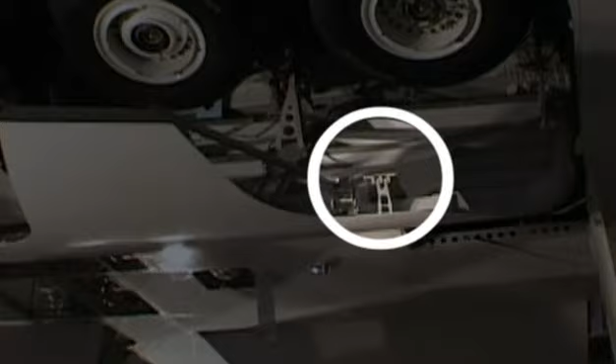The team suspect that the wheel might be sticking on a guide ramp, an aluminium plate where the wheel is supposed to push the door aside. Smearing it with grease should prove if this is quite literally the sticking point. The ramp does seem to be the problem. A permanent solution is needed, and fast.

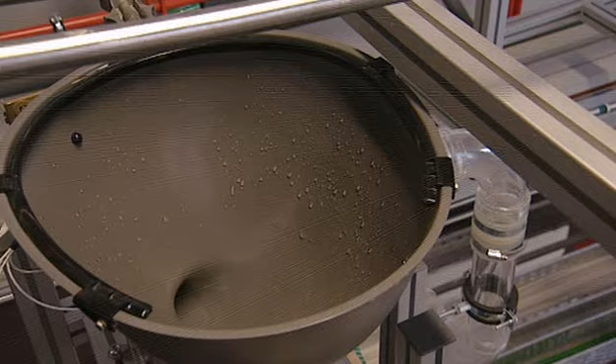Finding answers to sticky problems is all part of the business. Over in Hamburg, Airbus have been straining to ensure another important system works perfectly. Laid out in this building is a full-size test rig of the waste system for the A380. With up to 20 toilets and around 900 metres of piping, it's a big job. Senel Myrtle and Dennis Kaiser have been hard at work for the last 2 years.

We will give you a short demonstration of a toilet flush on the A380. So at first we have to evacuate the toilet system. I can start this, it will get a little bit loud.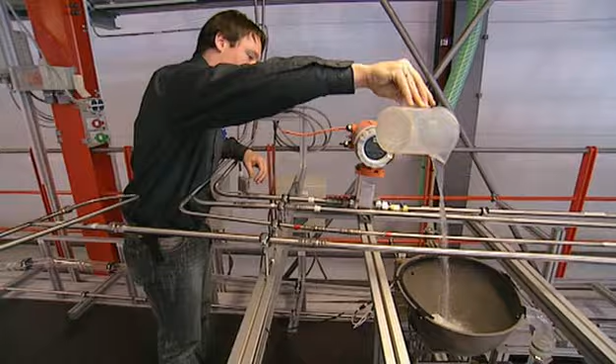The toilets work by pumping air out of waste tanks in the rear of the plane, causing a partial vacuum. When a toilet is flushed, air is sucked in to fill the vacuum and the waste is drawn down the pipes into the tanks. In the finished aircraft, these parts are made of titanium to save weight, but here Perspex is used for clarity.

This is Formula One technology for toilets. And the result is some seriously speedy sewage. The speed on the piping is around 60 meters per second. That's about 130 miles an hour.

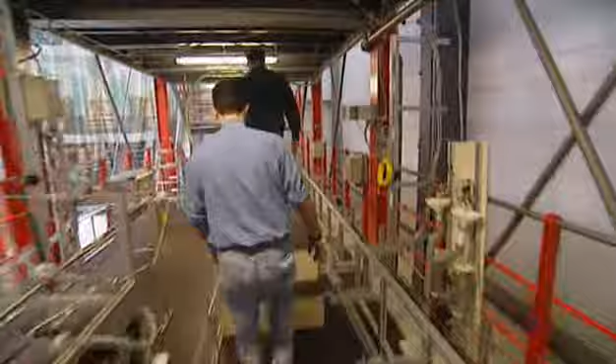Such high-performance plumbing is needed because of the size of the plane. At nearly 73 meters long, the loos at the front are a very long way from the tanks at the rear. This is the most forward toilet in the A380, the one the pilots normally would use. It is quite difficult because you have a pressure loss from the waste tanks to this toilet because of the length.

It's a challenge not to be sniffed at, but undeterred the guys give it a go. Just seconds later, the waste arrives at the tank, and flushed with success, the engineers bring the A380 another step closer to reality.

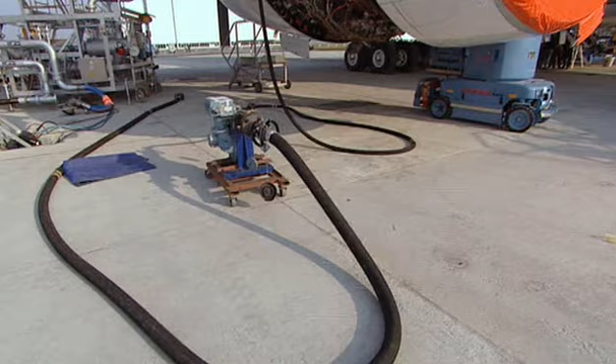By March the 14th, 2005, the A380 is parked outside the factory here in France. The customers for this first plane are technically the test pilots who will fly it, but there's still a lot of work to be done before they will accept the machine.

Head of the programme, Charles Champion, comes to take another look and discovers it's not all bad news. That's the most important part. The coffee machine for the flight test crew. If this doesn't work, they will never take the aircraft.

Joking aside, it's clear that the plane is far from ready. The landing gear is just one of the things that need to be finished. We still have a lot to do. There is a lot of activity, so some of it is related to troubleshooting and other related to closing the area, but we do have a lot of people still working on the aircraft.

The next day, the test pilots turn up for a photo shoot. The media are naturally interested in the 6 men who will fly the A380 for the first time. Although they pose happily for the cameras, it's clear where their real interest lies, for within minutes of the last shot being taken, they're in the plane checking out the new machine.

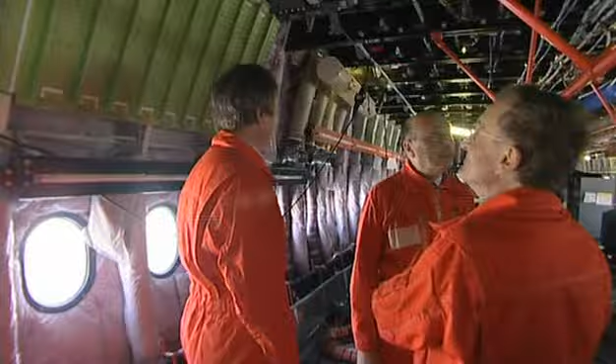For flight test director Fernando Alonso, it's important to feel comfortable at his post. This is the place where I will be sitting for the first flight, and it'll be almost my home for the next months ahead.

Surrounded by screens and readouts, Fernando will be able to monitor everything happening to the plane in real time. This screen, for example, it's what we call the flight display. So it shows us the aircraft pitch attitude and bank angle. It shows us the speed, the angle of attack, the altitude, the heading. So just by having a glance at that screen, we have a very good overall picture of the airplane.

The aircraft is equipped with sophisticated flight instrumentation, thousands of sensors that record every aspect of the plane's performance. Gathering this precious data is vital to the test flight program. If on the day of the first flight, the flight instrumentation does not work, we will not fly. I think that sums it up, you know.

Despite the seriousness of the task ahead, there's no doubt that A380 is beginning to generate a real buzz. It's really great to be here. We've been waiting for it so long, and now we're almost there.

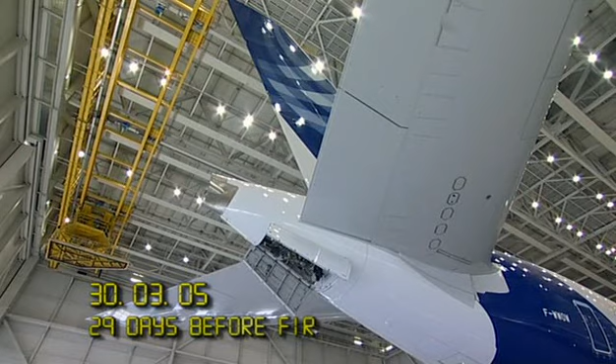March the 30th, and the plane is in a hangar again for final tests on the electrics and hydraulics. The moving surfaces are working, but one safety-critical system still remains unproven. Simon Sanders is back for a last-ditch attempt to show the landing gear will deploy properly. His team hope they've come up with a solution to the problem with the sticking wheels.

This is the ramp on the wing gear door where we put the grease last time. Now for a more robust solution, we've applied a layer of Teflon paint, similar to the coating you have on non-stick frying pans. This will reduce the friction when we do the freefall. We're going to now perform the test to demonstrate that with this low friction Teflon coating we've solved the problem.

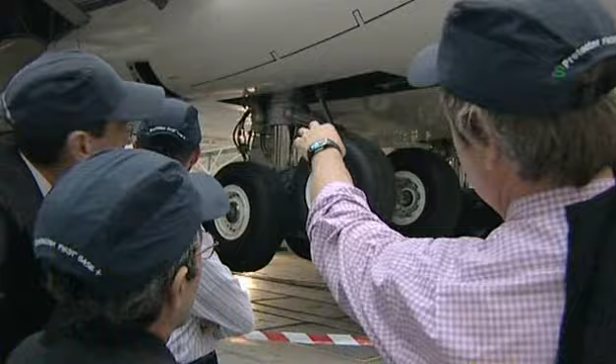The man they have to convince is test flight engineer Gerard Desbois, who'll be sitting in the cockpit during the critical first flight. If Gerard is not happy, the first flight will be delayed. I want to be sure, before taking the aircraft into the flight test department, that the landing gear is working perfectly well. If it doesn't work, I will refuse the aircraft until the system is completely safe.

As the landing gear is retracted in preparation for the test, everyone is aware they cannot afford to fail. In the cockpit, the system is primed. C'est parti, je lance.

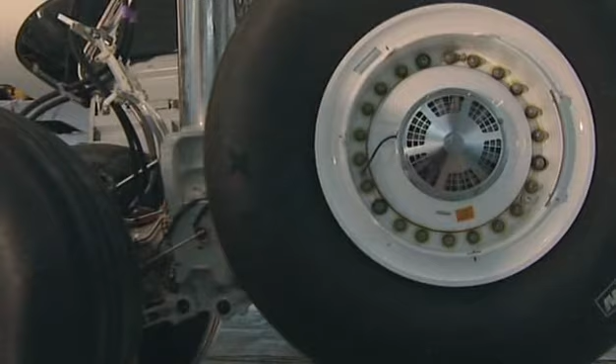The problem persists, but at least the gear slips free sooner than last time. In flight, the airstream will probably shake the gear free sooner still. It's up to Gerard to decide if he's happy to accept the plane with the gear as it is.

It's not marvelous, but it is working, and at least even if the left landing gear is not extended at the same time as the right one, yes, I think I will accept it.

Yes. The team will continue to refine the system, but at least the plane can now be handed over to the test pilots.

Fernando Alonso is taking the opportunity to look round the plane to check that nothing has been missed in the final push.

Like always, at the end there's a big rush. We get very excited. But at some point in time you need to take a decision, okay, now stop, it's over, and we take it over, because otherwise it will just go on forever and ever.

The plane has everything needed for the tests to come, including water tanks that will simulate the weight of hundreds of passengers.

But in the rush to get ready, it appears that something's been overlooked. The cabin lights are not working. Cabin illumination is switched off.

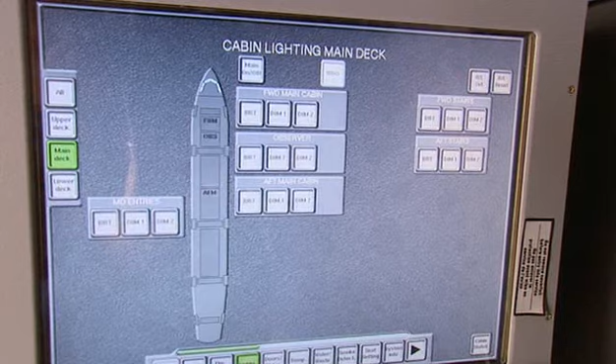So we have no possibility to switch on the cabin illumination. I need the lights. The cabin lights need to be okay. We have been having handover meetings for the past two weeks. Nobody ever said that the cabin lighting was not working. Nobody ever mentioned the limitations. Nothing was said about lighting. So now we put on the breakers. If something burns, it will burn.

With Fernando's words ringing in their ears, the engineers get to work, and in no time the lights are on. Immediately the mood changes, and the plane can be officially handed over.

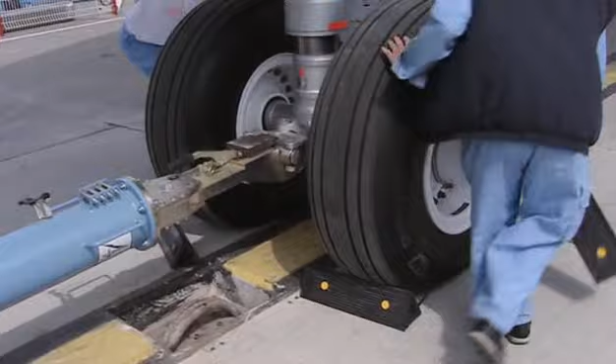Quite a crowd has turned out, and everyone wants to know how long it will be until the plane flies. Previous aircraft have taken about a fortnight, but Alonso won't be pinned down to a specific date just yet. I really do not want to be under the pressure of saying it's 10 days or 2 weeks. I don't know. It'll be when it'll be.

And nobody is keener and more eager to fly than we are. So I think you just have to rely that as soon as we feel that the airplane's ready, we will fly.

In their time, these guys have test flown everything from airliners to jet fighters, but this is their biggest challenge. On previous programmes, they have performed takeoffs with runways flooded with tons of water.

They've deliberately scraped the fuselage along the ground during takeoffs, and they've flown aircraft to Siberia to test them at 50 degrees below zero. Plus, they've thrown passenger planes around the sky in the most extreme manoeuvres.

It's a challenging but satisfying job. It's something which is rather demanding. It asks you to be at your best level permanently, because you cannot cheat. You are really flying in real conditions, and it's something which is stimulating, I would say.

Within the next 12 months, Jacques and his team will be pulling manoeuvres like this in the A380. But all that depends on getting the plane into the air. The first step is to get used to the aircraft, to make sure that they are familiar with all the systems and that everything is working.

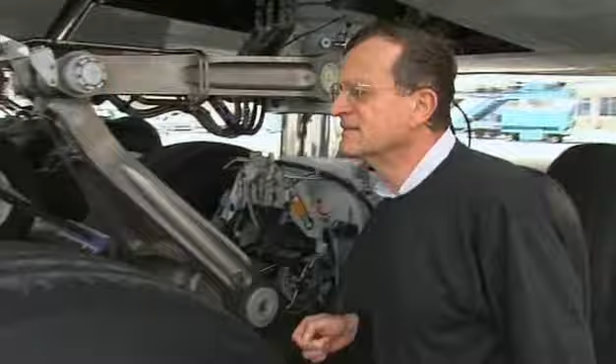Confidence in the aircraft is growing every day. There's still some little things to be fixed, but we're getting closer. Every day we're closer.

Each of the flight test team has a very specific job. And flight test engineer Jacky Joye's role is to monitor the engines.

On the way back from one of the ground runs, Jacques thinks he may have spotted a serious problem. He saw a white spot while taxiing back that looked suspicious. He suspects that something has gone into the engine, and there's a fear that whatever caused these white marks has damaged the 6-ton, 9 million pound power plant. Replacing the engine would almost certainly delay the first flight.

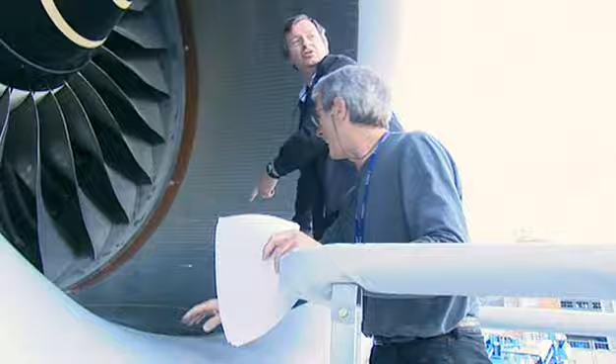Two days later comes a stark reminder of the dangers facing the test team.

Jim Fawcett has to make sure they are familiar with all the safety kit on board, including an emergency escape chute should the unthinkable happen. There's an emergency evacuation system fired by pyrotechnic handles in the cockpit and at the flight test engineer's station. They drive a firing door at the bottom of a tube in the main cargo door. The crew can jump safely out through this door and, with the aid of a parachute, get down safely to the ground.

After 2 weeks of hard work, there's one final test. The engines are brought to full power for the first time.

Accelerating hard, the plane reaches 130 knots, almost 150 miles an hour. The brakes are applied, the reverse thrust and spoilers all perform well.

With that, the world's biggest airliner is ready to go. The brakes are released and the crew confirm everything checks out, with only a minor fault noted on engines 1 and 2, nothing serious - impeccable.